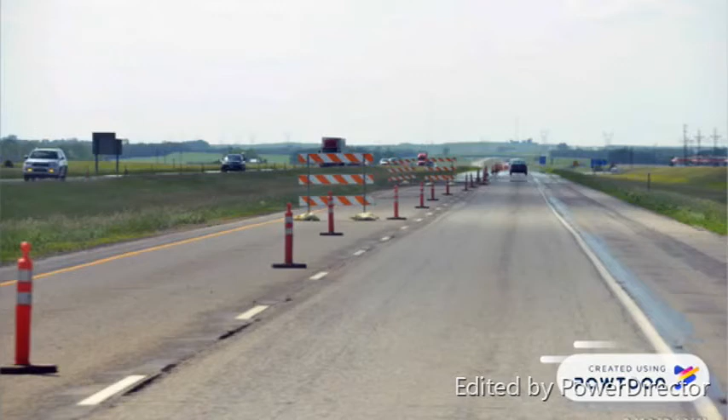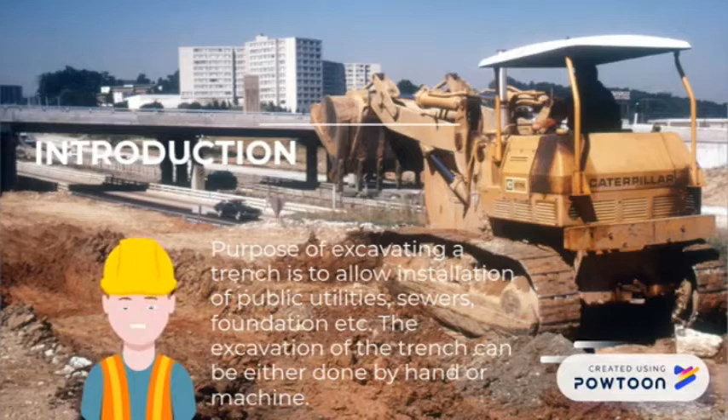So what is a trench? Trench is defined as an excavation whose length greatly exceeds its depth. The purpose of excavating a trench is to allow installation of utilities, sewers, foundations and else. The excavation can be done either by hand or by machine, depending on the dimension of the trench.

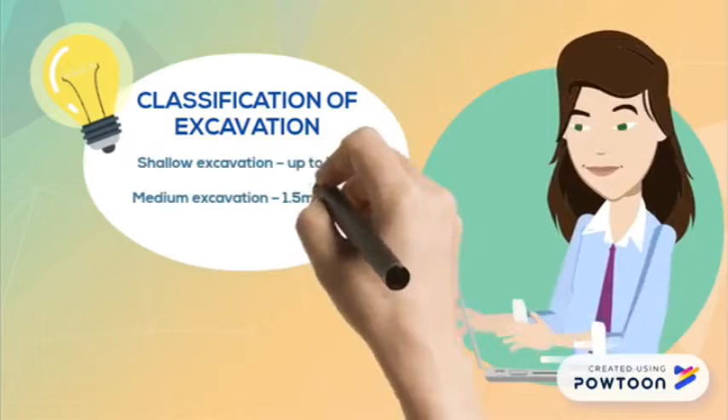There are three types of excavation: shallow excavation, medium excavation, and deep excavation. Shallow excavation is up to 1.5 meters and is used for pipeline and sewage.

Medium excavation is 1.5 to 3 meters, used for foundations of low and medium rise buildings. The last is deep excavation, which is for foundation construction over 3 meters.

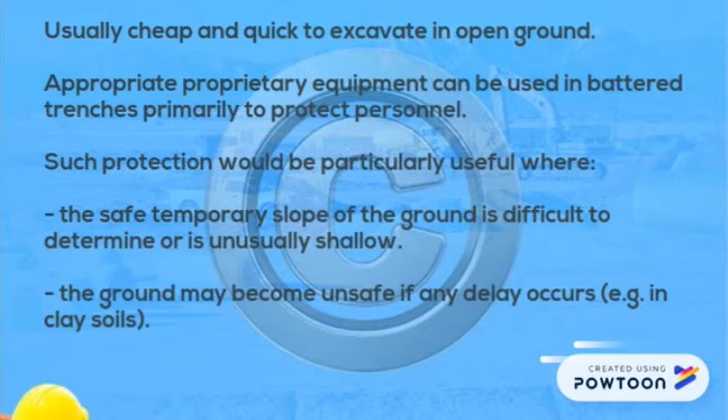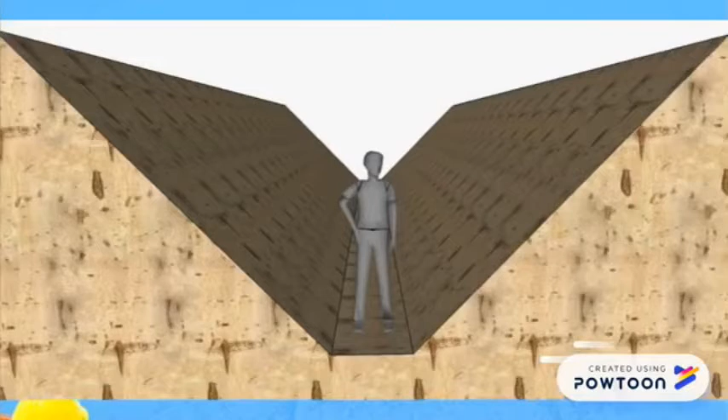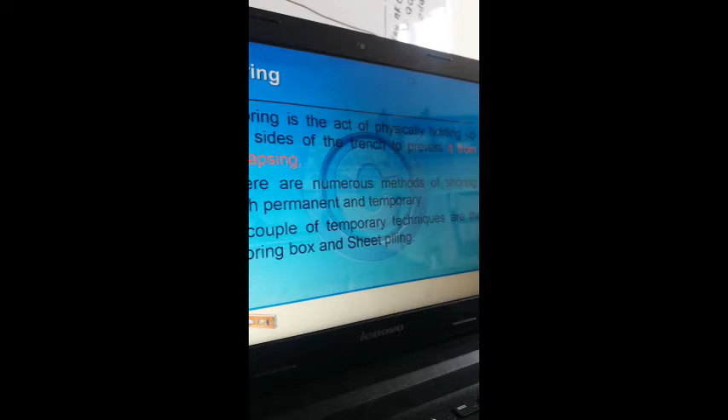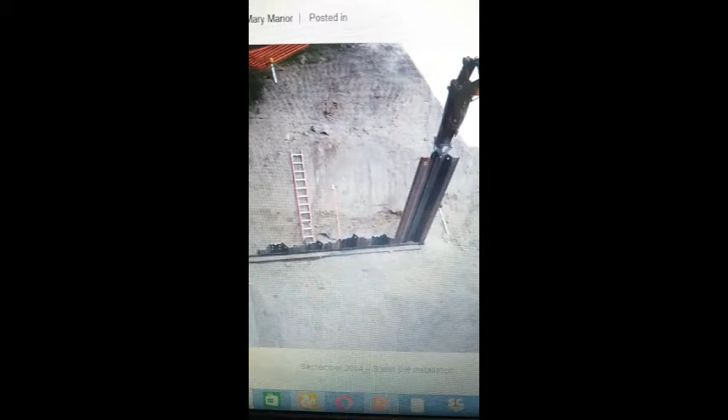Shoring is the act of physically holding up the sides of the trench to prevent it from collapsing. There are numerous methods of shoring, both permanent and temporary. A couple of temporary techniques are the shoring box and sheet piling. This is the example of the shoring box, and this is the example of sheet piling.

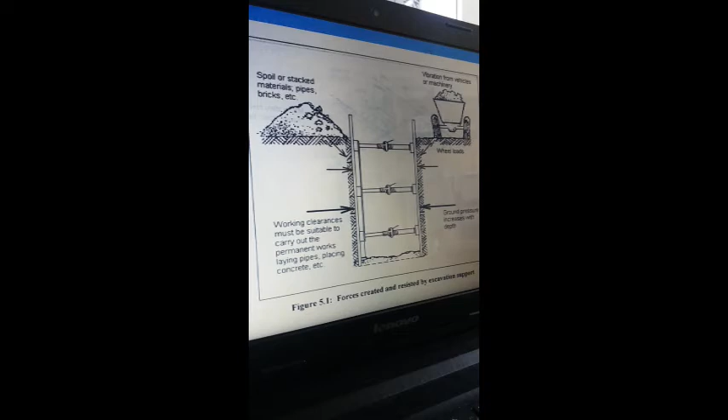This is the shoring to support the ground, and the methods of timbering that we use in the shoring are such as pinchers, open boarding, and closed boarding.

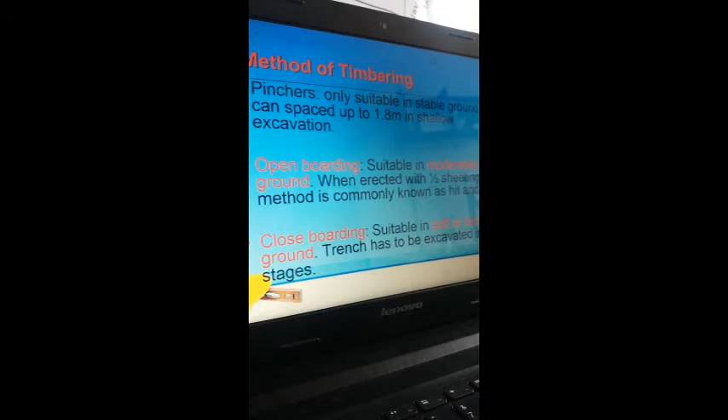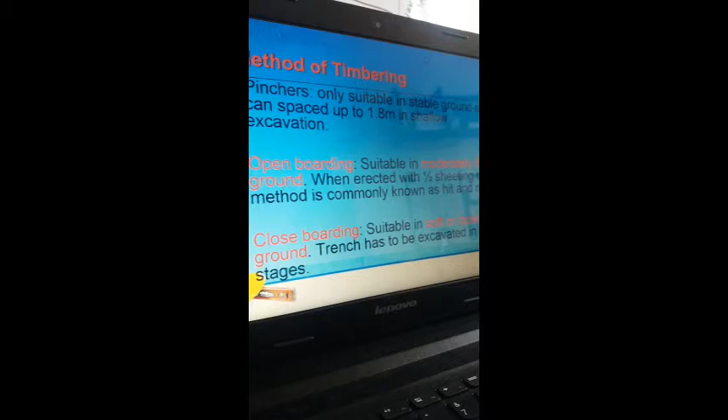Pinchers are only suitable in stable grounds and can space up to 1.8 meter in shallow excavation. Open boarding is suitable in moderately firm grounds when erected with half sheeting, commonly known as hit and miss. Closed boarding is suitable in soft or loose grounds, and the trench has to be excavated in stages in soft or loose ground.

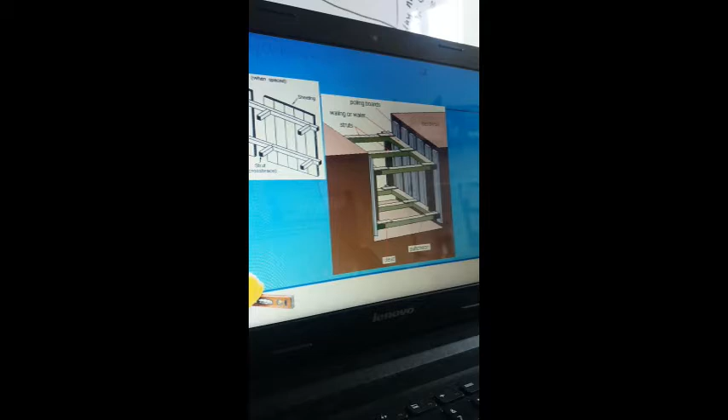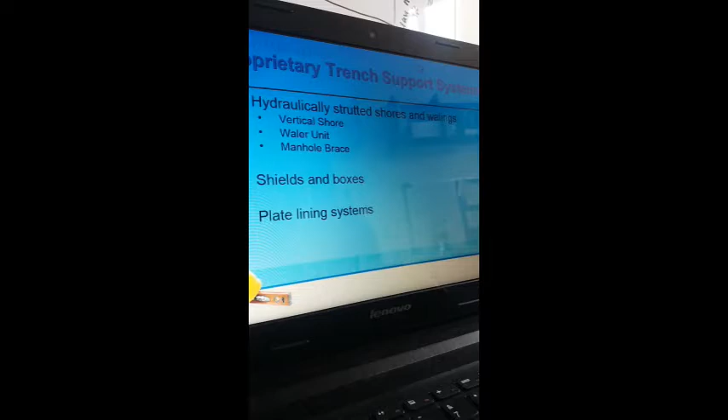The trench support system has three types, such as hydraulically strutted shores and wallings, shields and boxes, and plate lining systems. Hydraulically strutted shores and walling have three types: vertical shore, waller units, and manhole brace.

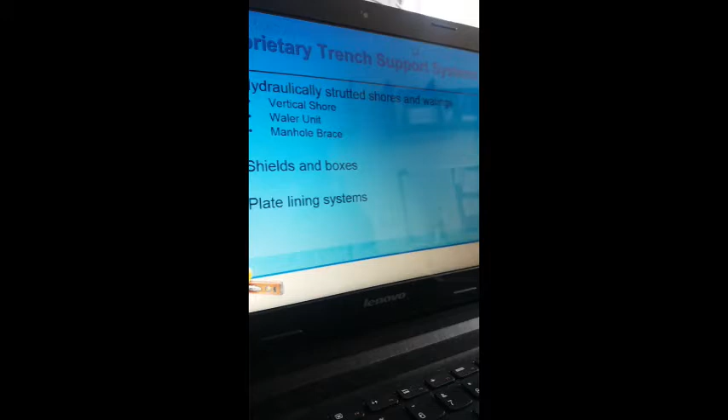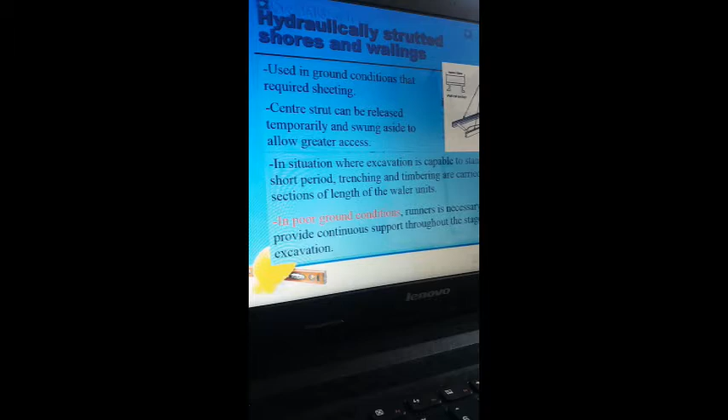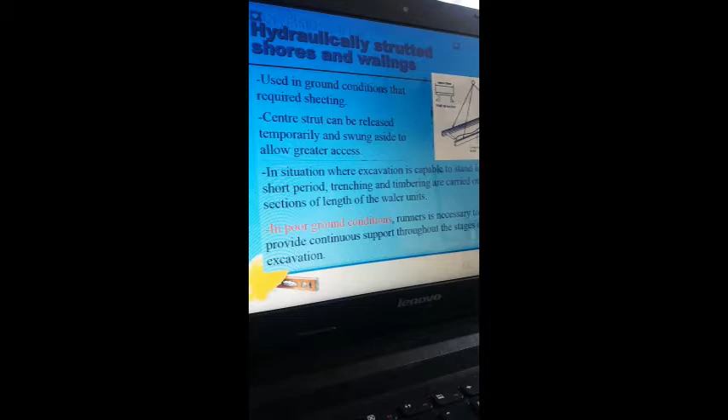The waller unit is used in ground conditions that require sheeting. The center strut can be released temporarily and swung aside to allow greater access. In situations where the excavation is capable of standing for a short period, trenching and timbering are carried out in sections of lengths of the waller units.

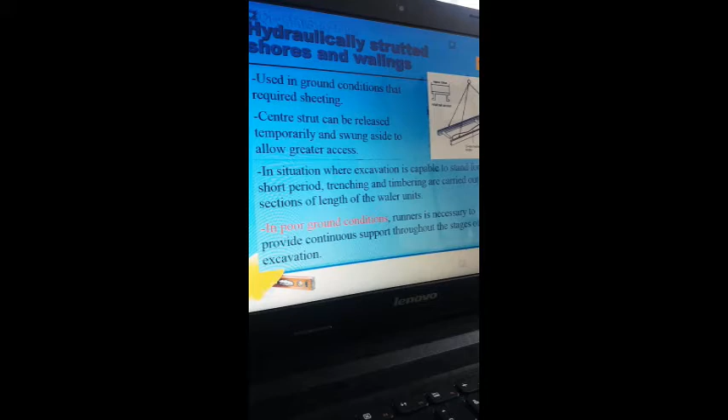In poor ground conditions, runners are necessary to provide continuous support throughout the stage of excavation. The waler system size is like this. Here, the waler with hydraulic cylinder is designed for production work.

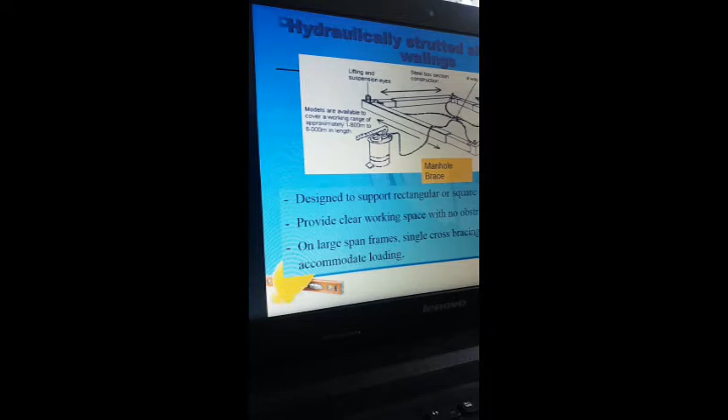For the manhole brace, it's designed to support rectangular or square excavations, providing clear working space with no obstructing spaces. On large span frames, single cross bracing may be needed to accommodate loading, such as for a manhole shaft.

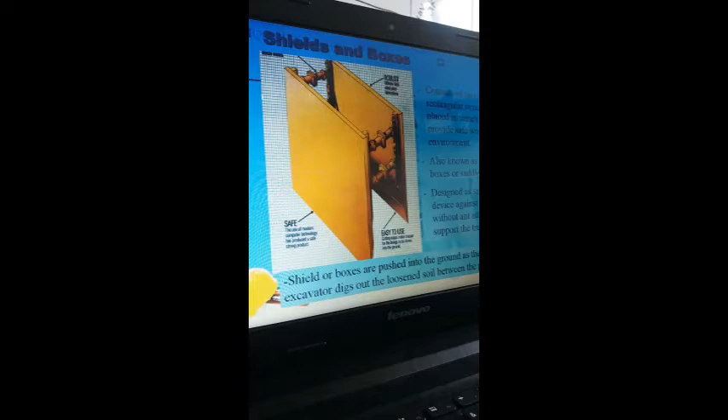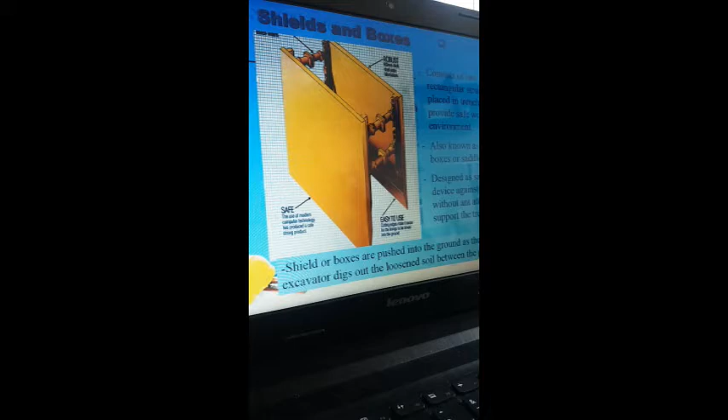For shields and boxes, it consists of two side rectangular structures placed in the trench to provide a safe working environment, also known as trench boxes or shields, designed as a safety device against collapse without an attempt to support the trench sides. The shield or box is pushed into the ground as the excavator digs out the loosened soil between the plates. So the shield box is safe.

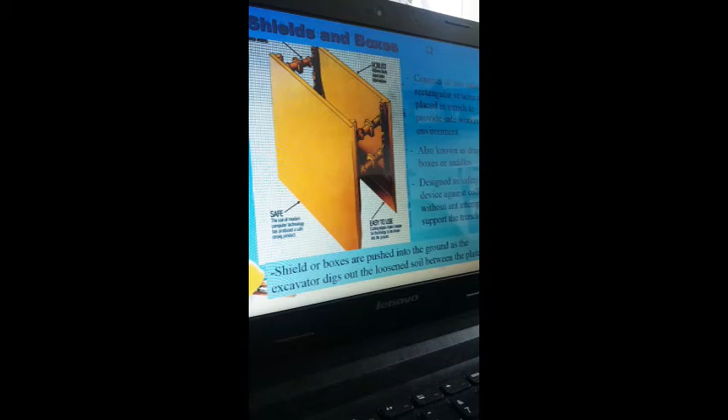The use of modern computer technology has produced safe, strong products, easy to use. The cutting edge makes it easier for the lining to be driven into the ground, with robust 100mm thick steel plate fabrications. That's the advantage of the shields and box. These are the examples of the shield and box.

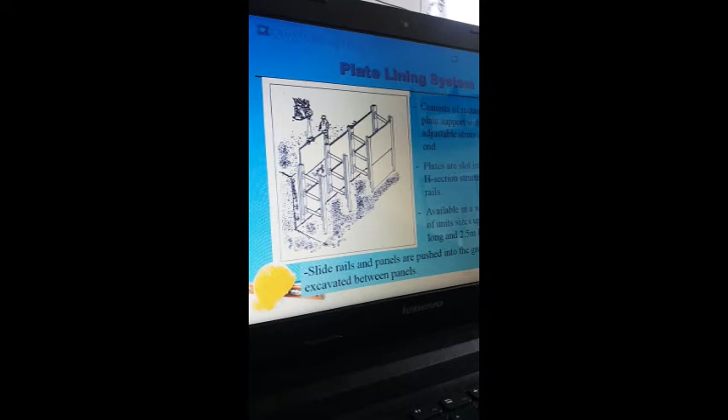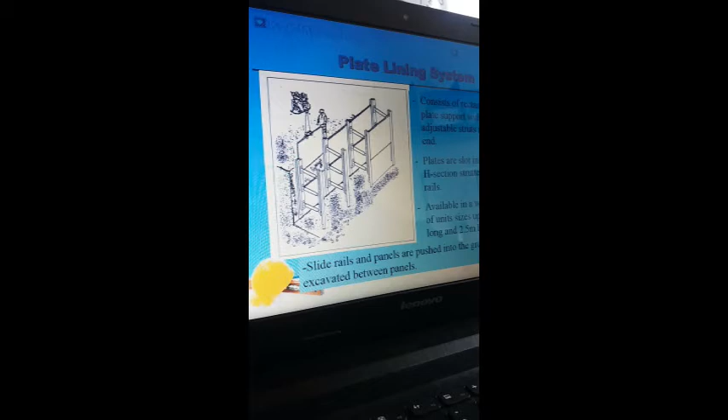For the plate lining system, it consists of a rectangular plate support with adjustable struts at each end. Plates are slotted into vertical H-section, strut guide rails, available in a wide variety of units, with sizes up to 5 meters long and 2.5 meters high. Slide rails and panels are pushed into the ground and soil is excavated between the panels.

Okay, let me see this. Plate lining system. They combine together.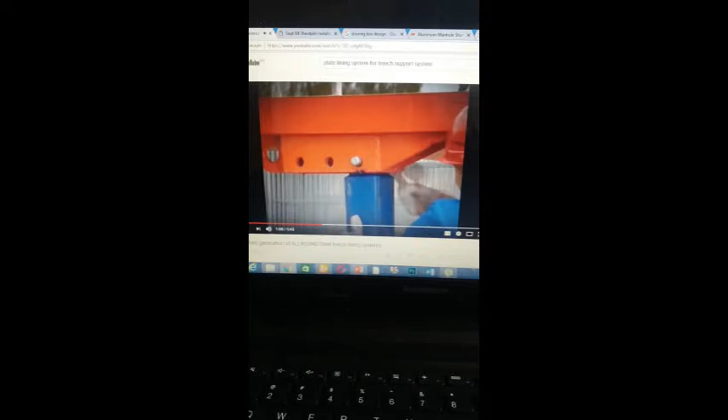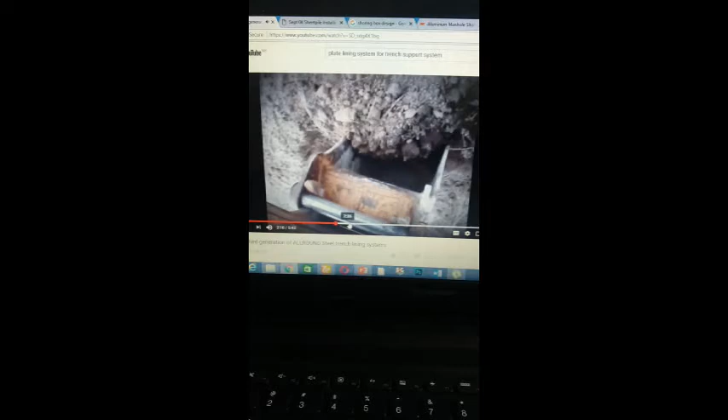The excavator digs a hole which enables you to place the box. Now you can continue. Excavate first. With the help of the shovel, which you can press or hit on the corners of the box so it moves further into the ground. The integrated baffle plate makes deformations almost impossible, as long as only the corners are used for pressing or hitting.

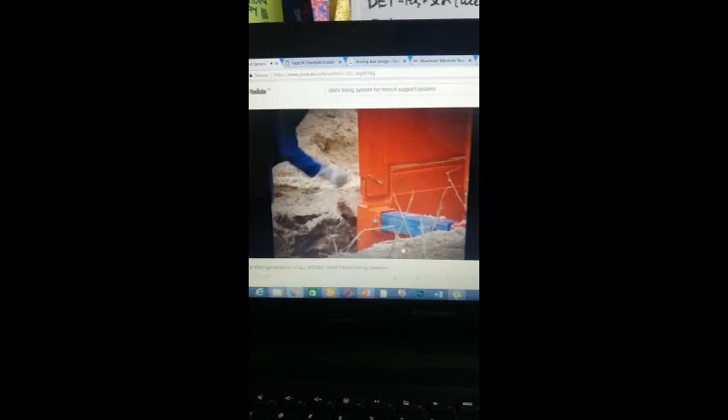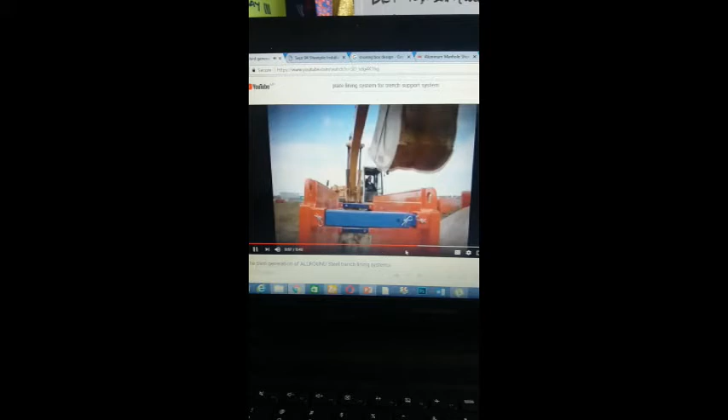The extension box is assembled in the same way as the basic or ground box. Put the extension box on top of the ground box and connect the boxes with the extension bolts. Proceed to dig in the same manner as before.

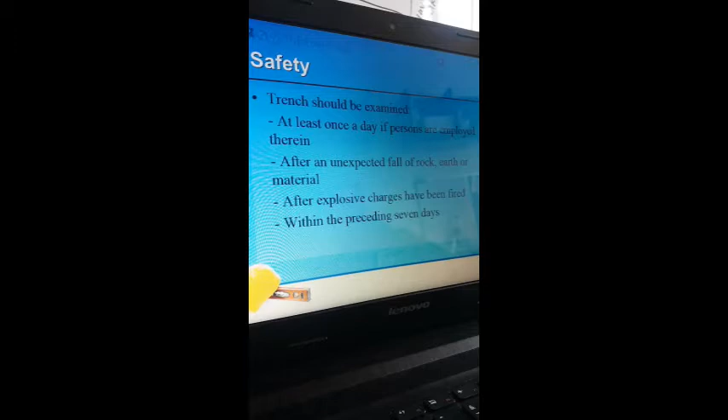For safety of shoring, the trench should be examined at least once a day if persons are employed there.

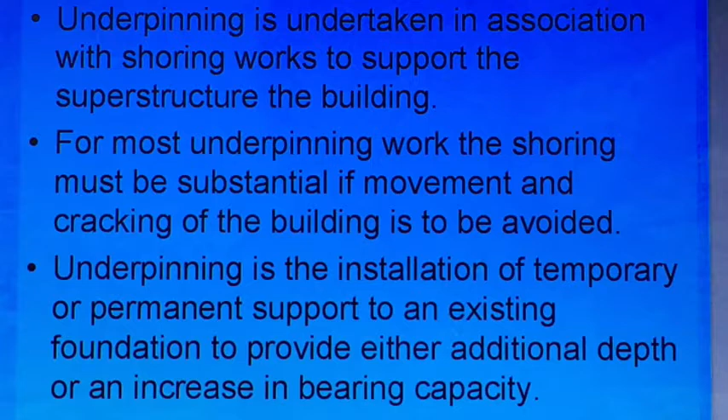Okay, for the next slide, the process of underpinning may be required. Why we need process of underpinning? Because to support a structure which is sinking or tilting due to the ground subsidence or failure of the existing foundation.

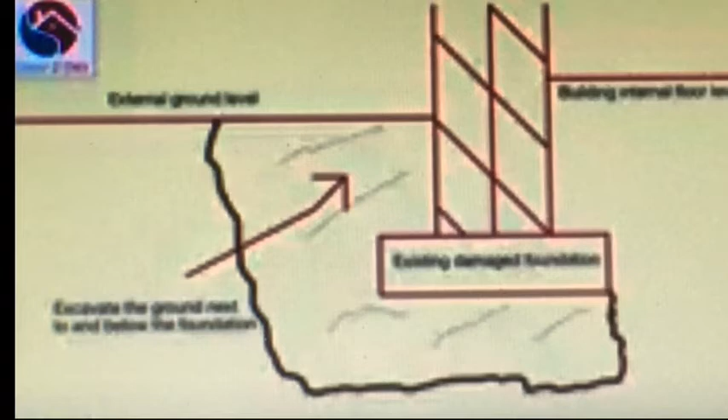Hey guys, this is the process of traditional underpinning, which is for an existing damaged foundation. First of all, we must excavate the ground below the foundation. Second, build up the concrete or brickwork below the foundation. Third, pinning between old and new work.

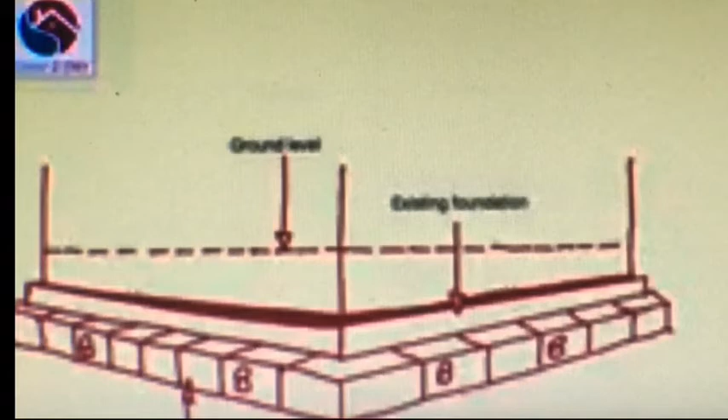And fourth, rectangular pits are excavated and concrete or brickwork will replace them, bonded to form a continuous strip of underpinning. Pinning between the old and new work is important, using mortar, and it must be compacted well.

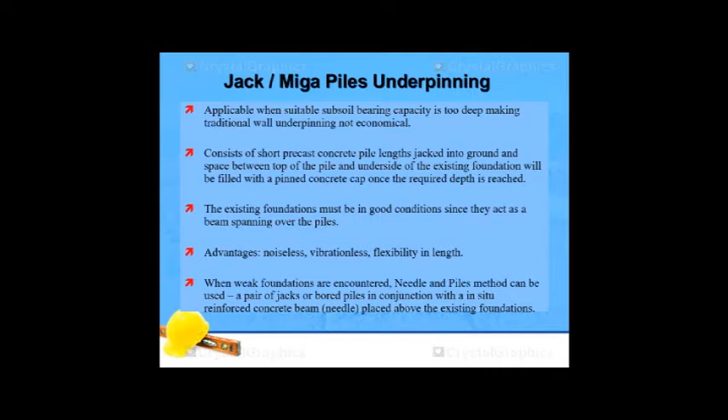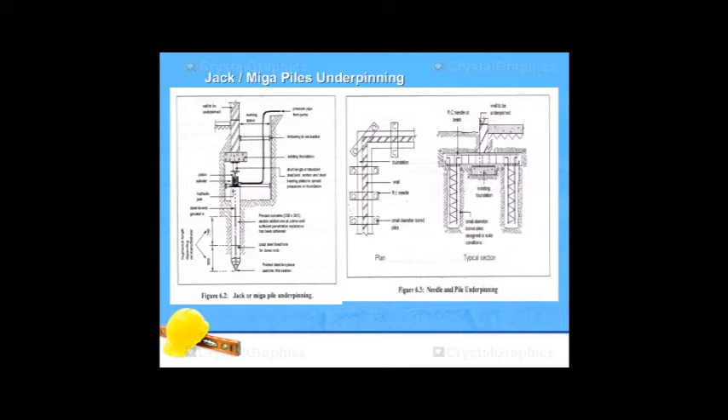Pynford stools. Pynford stool is a modification of the traditional system where an RC beam is inserted into the wall to be underpinned in continuous runs at foundation level. It is useful if differential settlement is encountered and jacking is to be used to level the structure. Meaning that if this is applied to the wall and there is settlement that is not level, one side is higher and the other side is lower, they are not the same.

The sixth is formwork removed and cured. The beam is pinned to the underside of the existing wall. The stool remains as an integral part of the new beam. This RC beam may provide adequate extra support or be used as a sound base for further underpinning work.

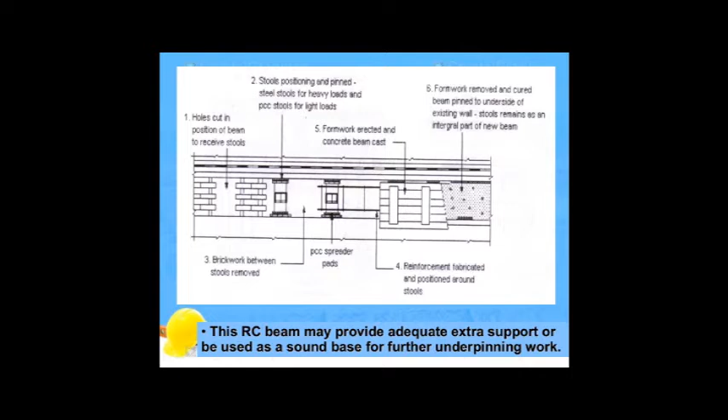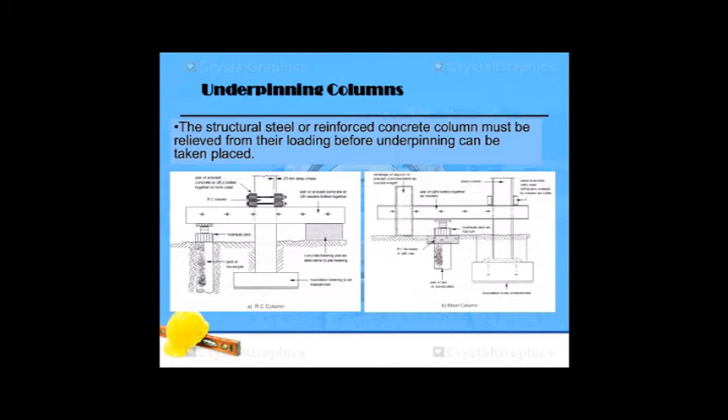The steps for underpinning a column: first, a support collar of welded steel or precast concrete, chased to a depth of 20 mm to 50 mm, is fixed around the perimeter of the column. Second, loading is transferred from the collar to cross beams or needles, which later transmit it to the ground at a safe distance from the proposed underpinning excavation.